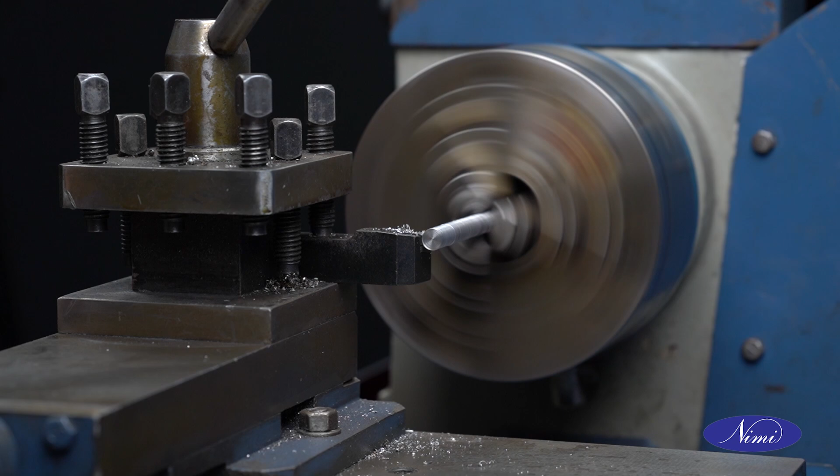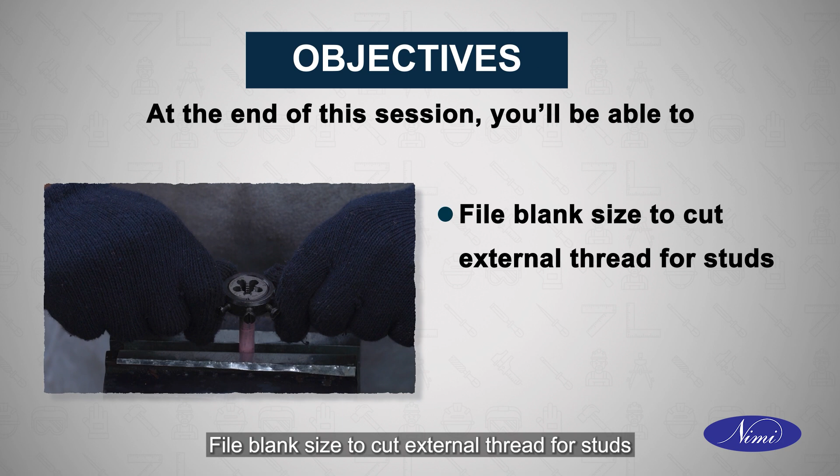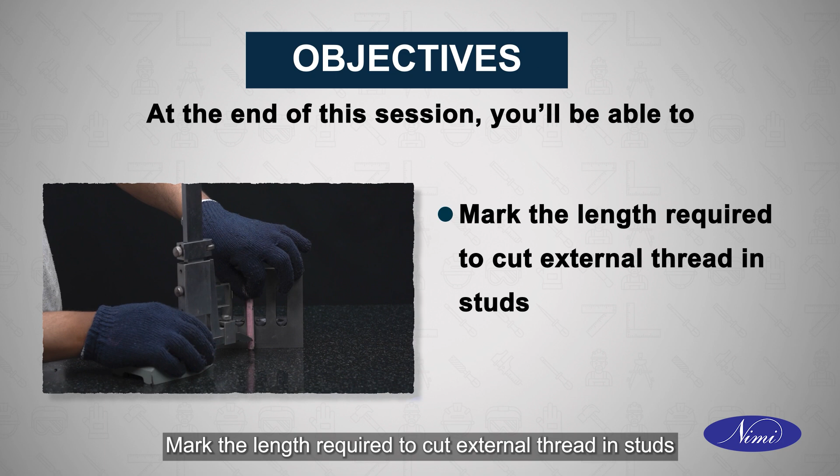Let us look at the objectives of this session. At the end of this session, you will be able to file blank size to cut external thread for studs, chamfer both ends of the studs, mark the length required to cut external thread in studs, cut external thread using die and die stock in studs, and check the external thread using screw pitch gauge.

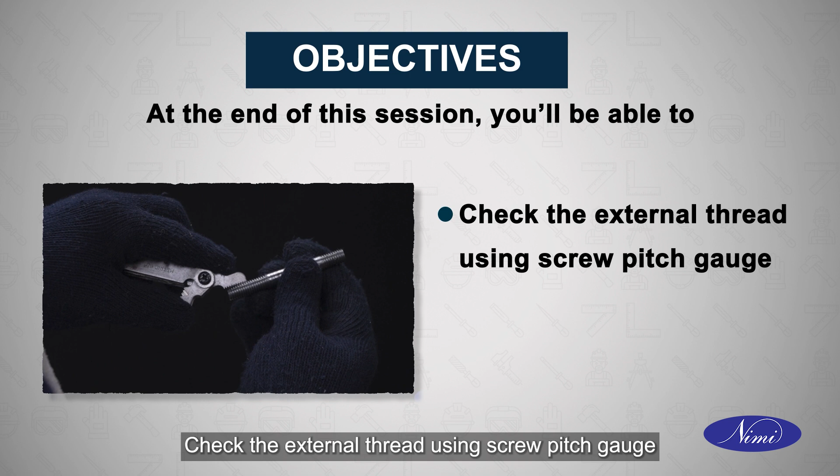Metal fabrication is the creation of metal structures by cutting, bending and assembling processes. It is a value-added process involving the creation of machine parts and structures from various raw materials.

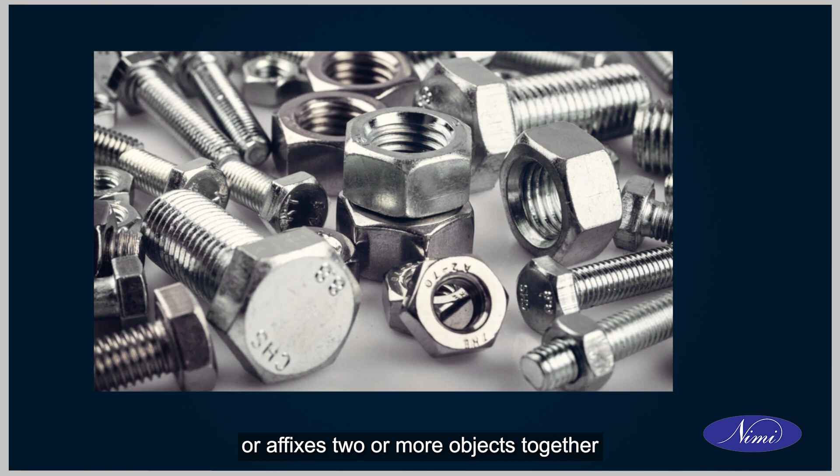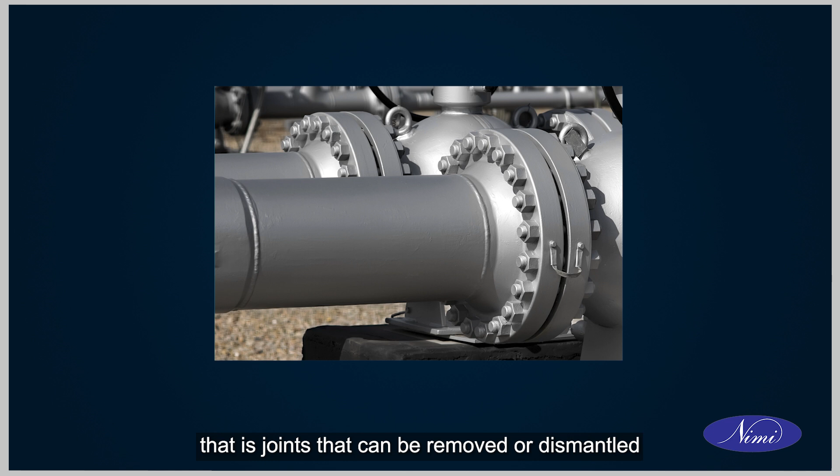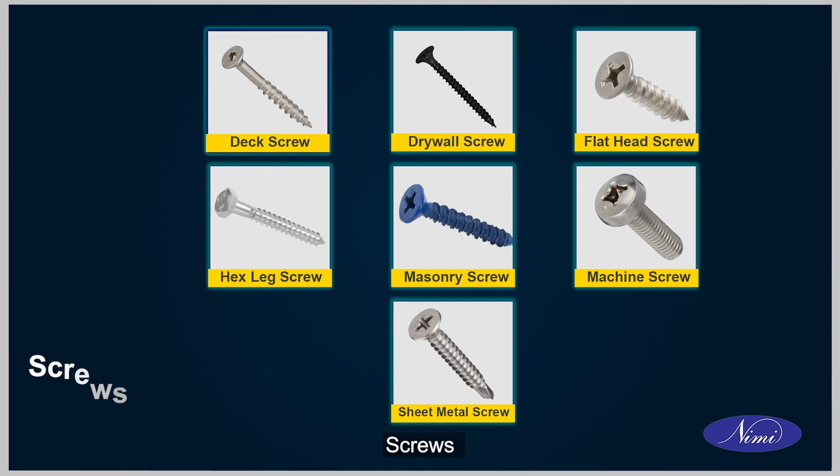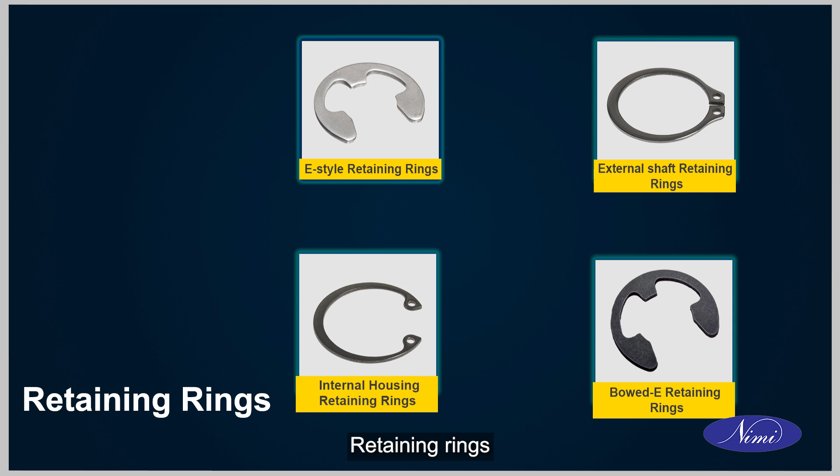A fastener is a hardware device that mechanically joins or affixes two or more objects together. In general, fasteners are used to create non-permanent joints, that is, joints that can be removed or dismantled without damaging the joining components. There are various types of fasteners, namely nuts, bolts, screws, washers, key and keyways, studs, rivets, anchors, nails, inserts, retaining rings, clevis pins and cotter pins.

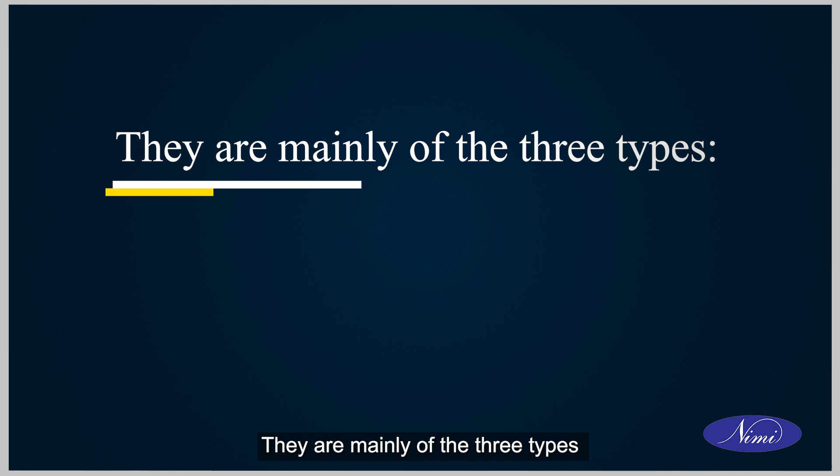Studs: a stud is a relatively long rod that has threads on both ends without a head. Its main advantage is that we can separate the upper part simply by opening the nut while keeping the lower part intact. They are mainly of three types.

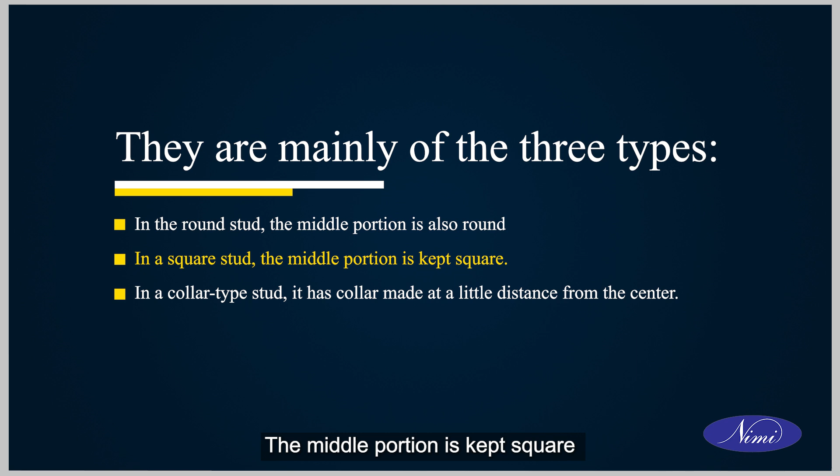In the round stud, the middle portion is also round. In a square stud, the middle portion is kept square. In a collar type stud, it has a collar made at a little distance from the center.

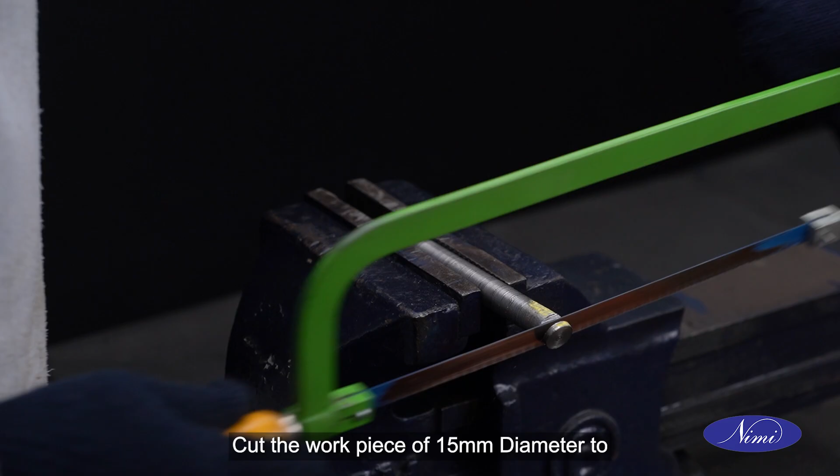Let us now learn the preparation of studs. Cut a workpiece of 15 mm diameter to 130 mm length. Hold the workpiece in a 3-jaw chuck.

Perform facing operation on one side of the workpiece. Perform plain turning operation to get the roundness. Turn the workpiece to get a size of 10 mm diameter for half its length. Rotate the workpiece and perform plain turning operation on the other half to reduce the diameter to 10 mm.

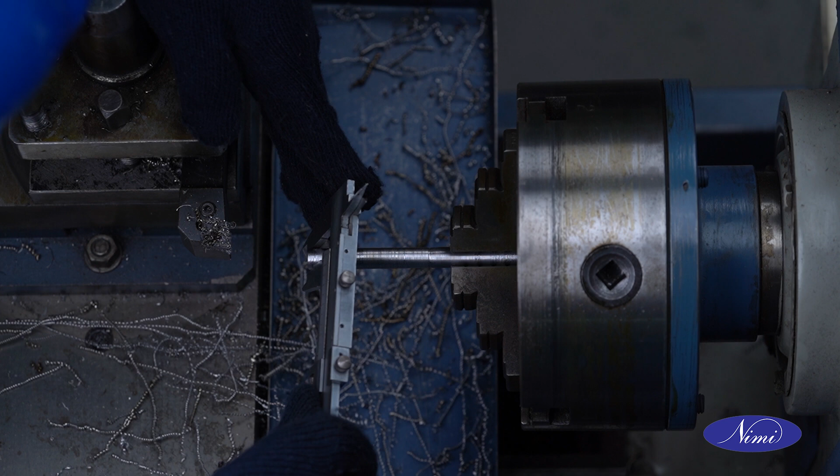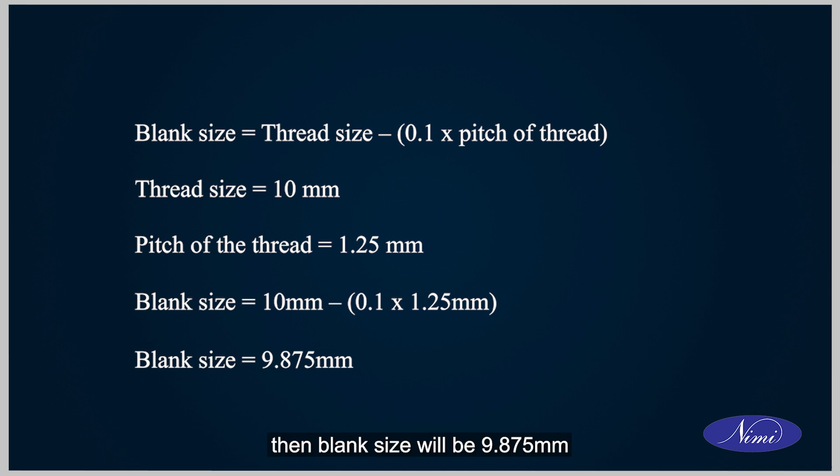For M10 thread size and pitch of 1.25 mm, the blank size will be 9.875 mm. Turn the workpiece to get a blank size of 9.875 mm.

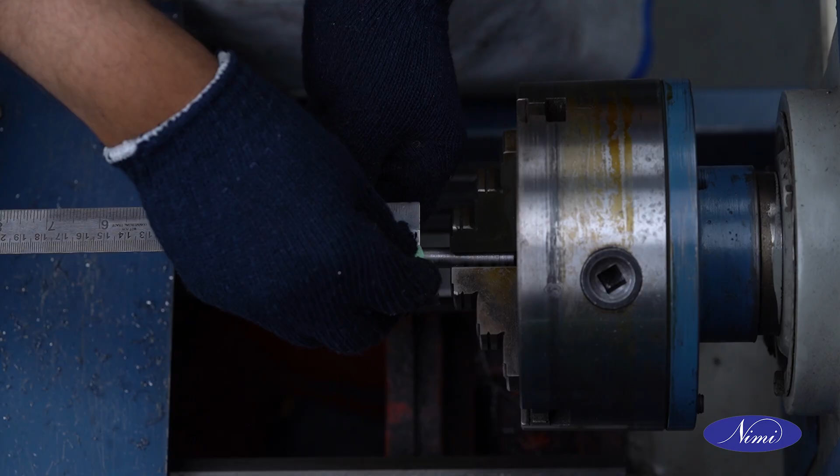Part off the workpiece for a length of 85 mm using a parting tool. Perform facing operation to get an overall length of 80 mm. Chamfer one end of the rod for a dimension of 2 mm into 45 degrees.

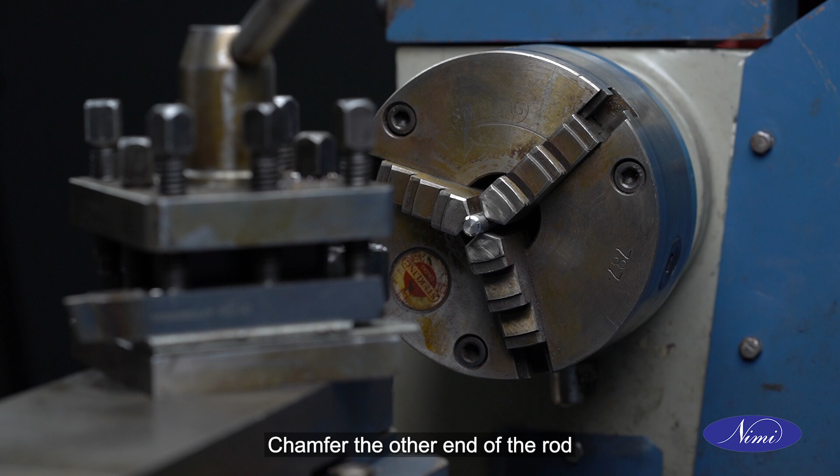Rotate the workpiece and fix it to the 3-jaw chuck. Chamfer the other end of the rod for a dimension of 2 mm into 45 degrees. Apply marking media on the cylindrical surface of the workpiece.

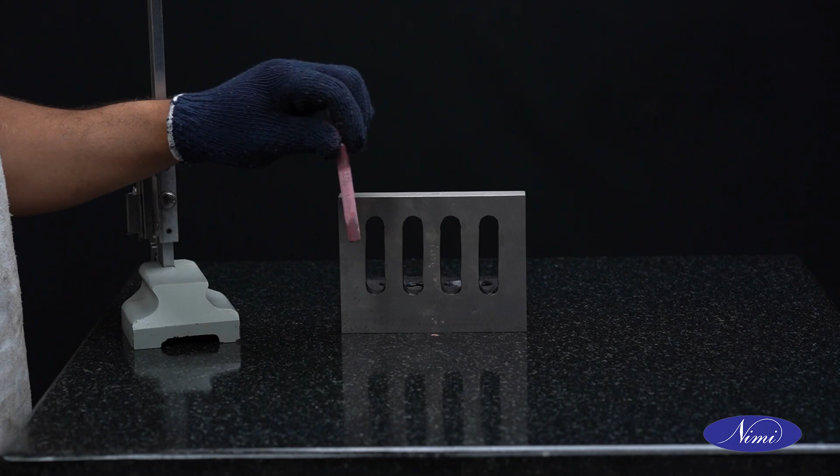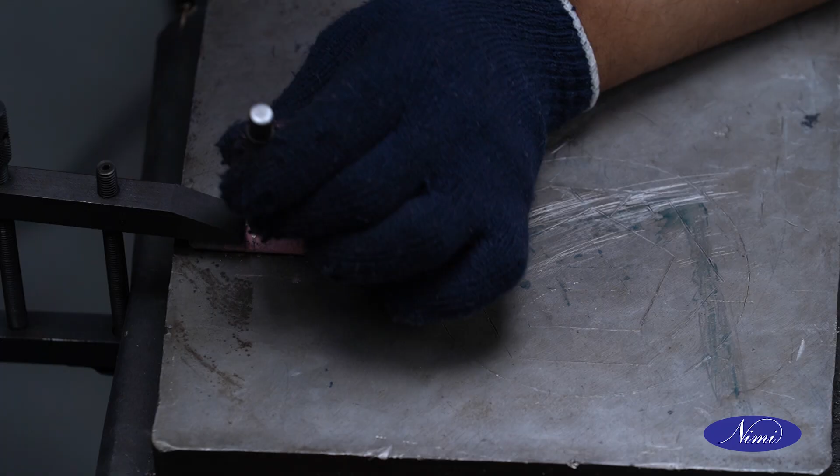Place the workpiece on the surface table supported by an angle plate. Mark the line at a height of 15 mm and 55 mm on the face of the cylindrical workpiece using a vernier height gauge. Punch witness marks to cut external thread.

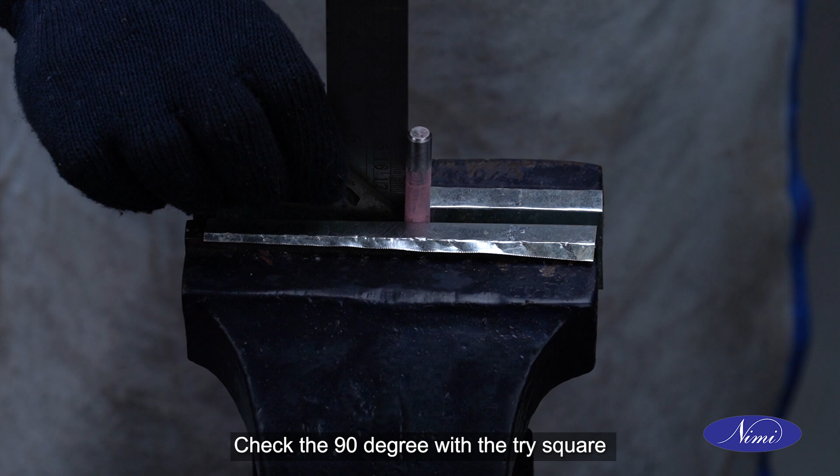Hold the cylindrical rod in a bench vise at 90 degrees with aluminium vise clamps. Check the 90 degree with the try square. Set the M10 circular split die in the die stock.

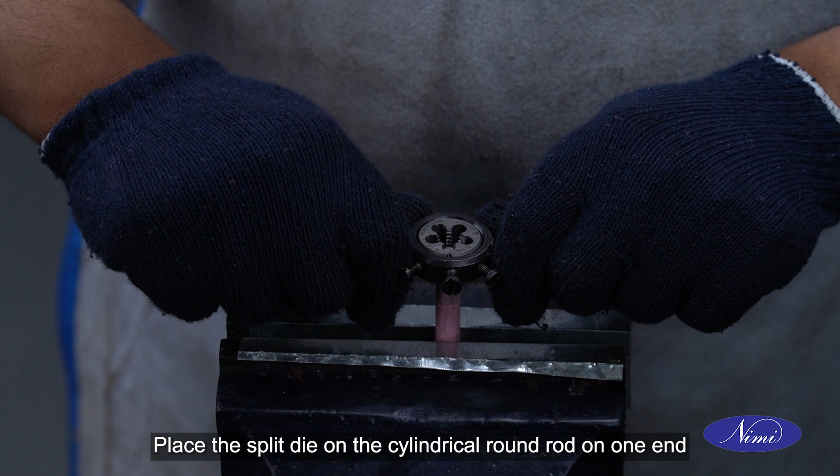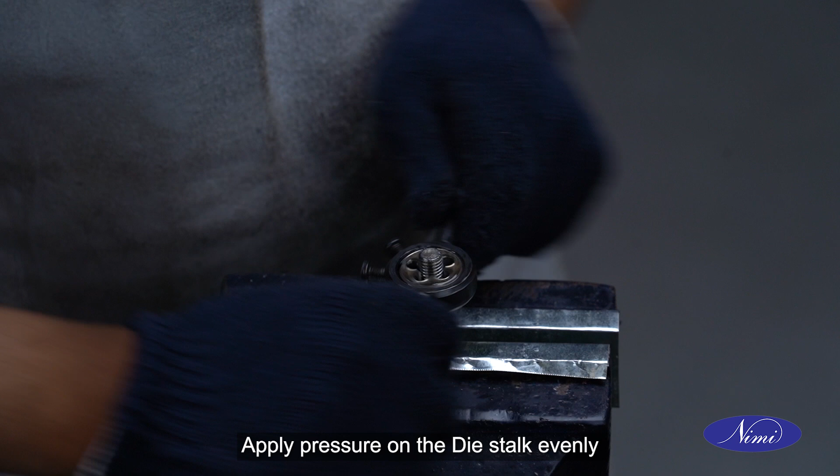Place the split die on the cylindrical round rod at one end. Cut the external thread by rotating in clockwise and anti-clockwise direction. Apply pressure on the die stock evenly and turn in clockwise direction to advance the die in the stud blank.

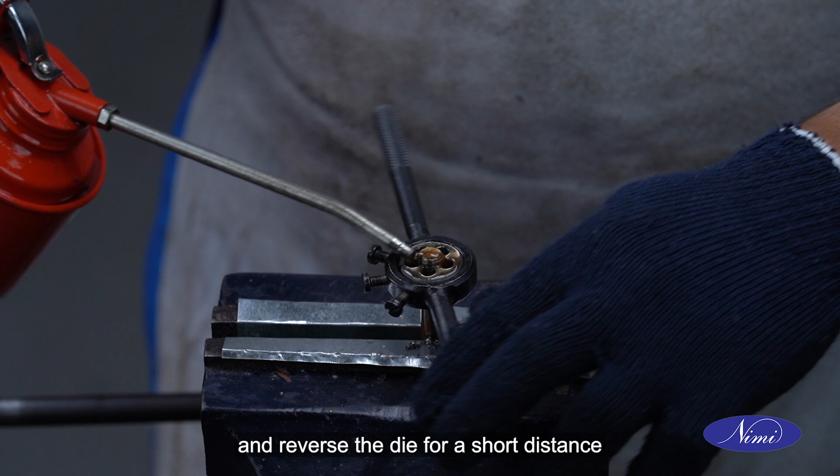Reverse the die for a short distance to break the chips. As per the previous procedure, cut the external thread up to the required length of 15 mm. Clean the thread with petrol.

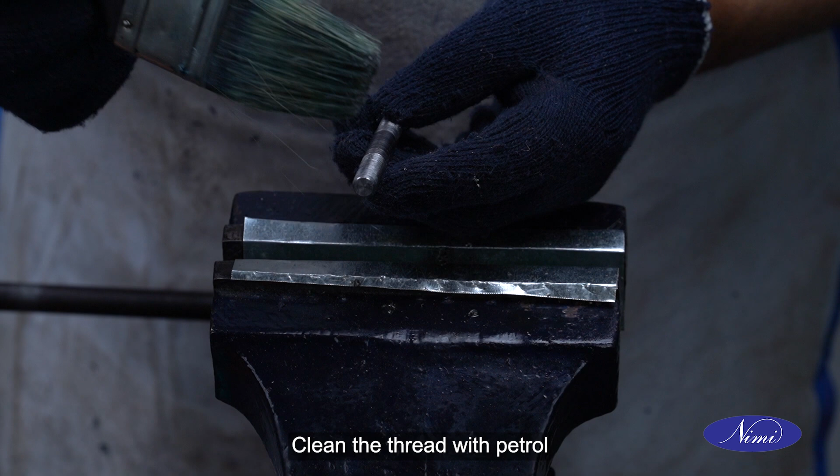Check the thread with a suitable screw pitch gauge. Similarly, repeat the thread cutting process on the other end of the rod to the required length of 25 mm. Check the thread with a suitable screw pitch gauge.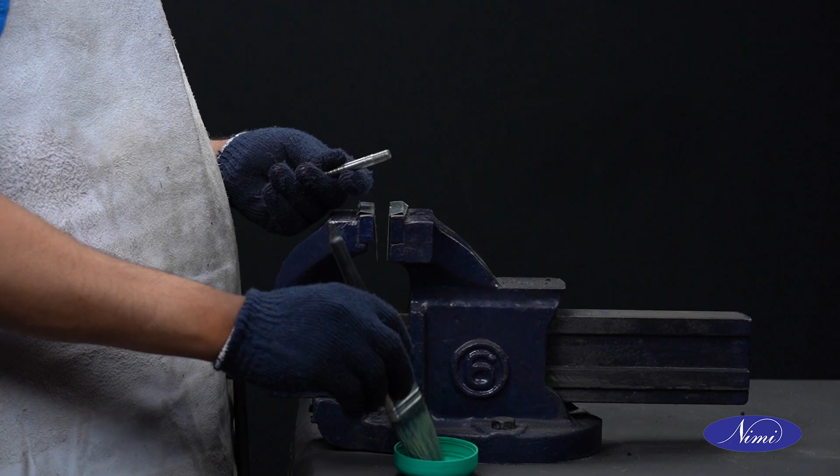Clean the thread to remove the burrs if any. Apply a little oil and preserve it for evaluation.

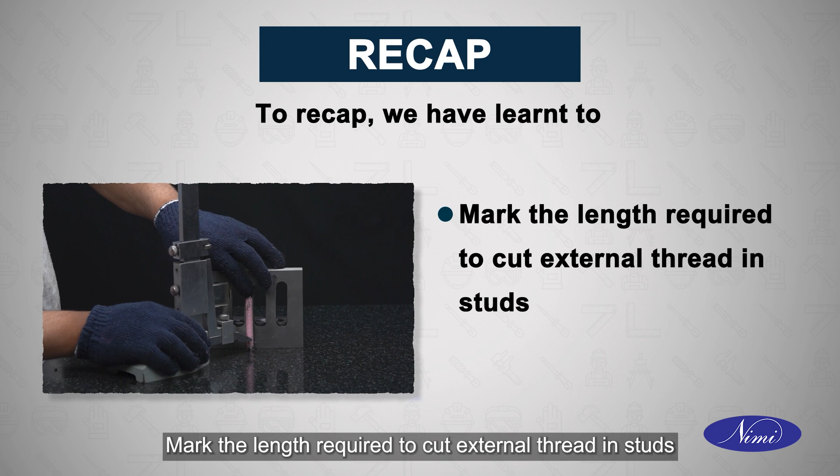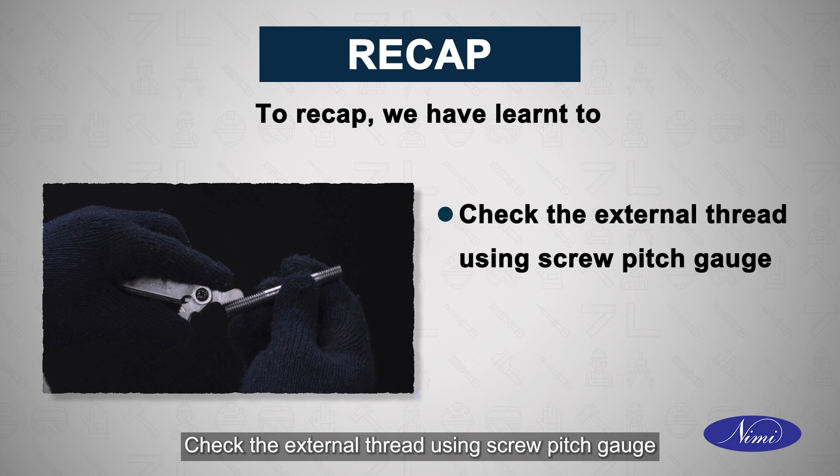To recap, we have learned to file blank size to cut external thread for studs, chamfer both ends of studs, mark the length required to cut external thread in studs, cut external thread using die and die stock in studs, and check the external thread using screw pitch gauge.